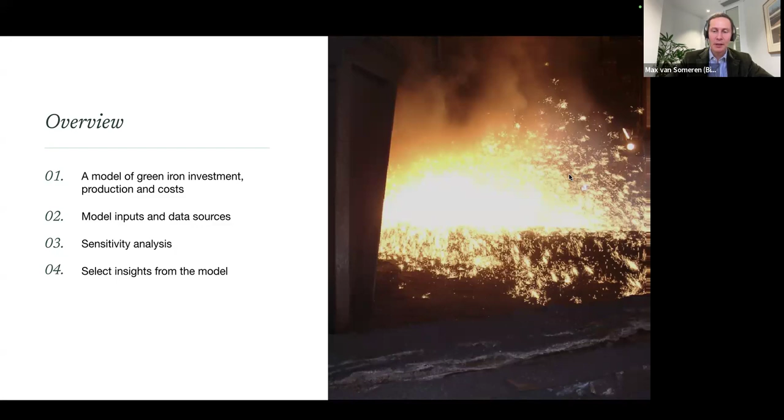So let me take you through the model. We can think about the modeling process in 3 different nested layers, a bit like an onion. So in the middle, we have the simulation of our iron production system, and I'm going to spend the majority of the time today talking through that. Outside of that, we then have an optimization process. So that runs the simulation hundreds of different times to come up with the optimal configuration of the iron making system to give you the lowest levelized cost of iron. And then we take those results and we post-process them into the results which were presented in the report.

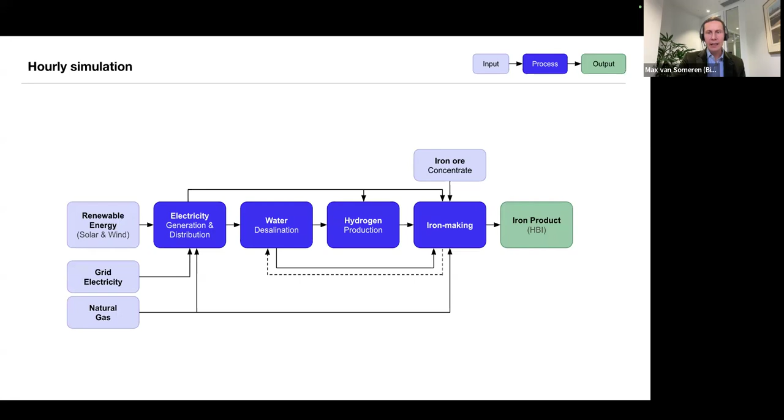In each hour, the first thing that the model needs to do is to identify how much of the input resource is required to meet the iron demand. This model always wants to produce as much iron as it can, so it produces up to the limits of the constraints which are put upon it.

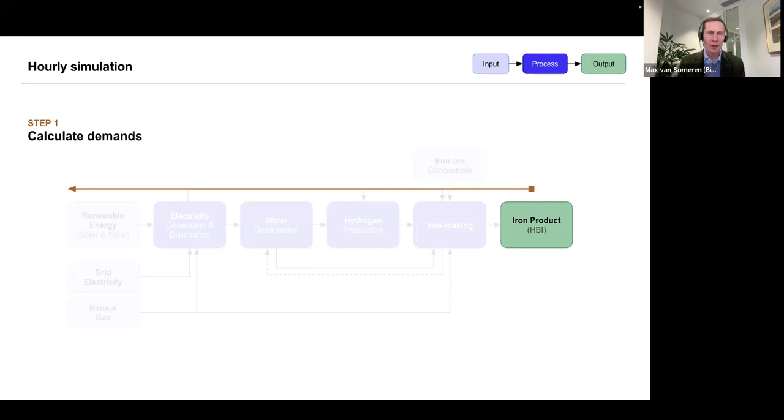We can feed back from the target amount of iron, so the nameplate capacity of the iron making plant. We can feed that back to the requirement of hydrogen, the requirement of water, and the requirement of electricity. Electricity is an input into all stages of the process, and the largest consumer by far is the hydrogen. So everything really comes back to understanding what your electricity supply needs to be.

As I mentioned before, we use historic weather data to estimate the availability of renewable electricity, and that will depend on the specific configuration of the model which we're running, so the size of your solar farm, the size of your wind farm. If there is sufficient renewables available, then the whole system will run off renewable energy. However, if there is insufficient renewable energy available in that hour, well, the first thing the system will do is it will look to the battery. So is there sufficient electricity in the battery that it can draw upon?

If the battery is empty or the power outputs of the battery are exceeded, then the system will look at behind the meter gas turbines if they've been included in the simulation. We didn't actually include them in the core cases which we present in the report, but they are presented in some of the variations later on in the report.

And then finally, if there's still a shortfall of electricity, then the system will turn to the electricity grid, and it will look to the grid for firming power up to the limit of emissions constraints which we've applied. And for our core cases, that meant staying within the constraints of the hydrogen production tax incentive, 600 kilos of CO2 per ton of hydrogen produced.

Now, if we're in the happy situation where we have excess renewable energy, then the first thing that we do is try and fill the battery behind the meter. If we've still got excess electricity, that can be sold back to the electricity grid. And if we have hit the limits of the grid or the price of electricity is actually negative, then the system will curtail, so it will stop the production of renewable energy.

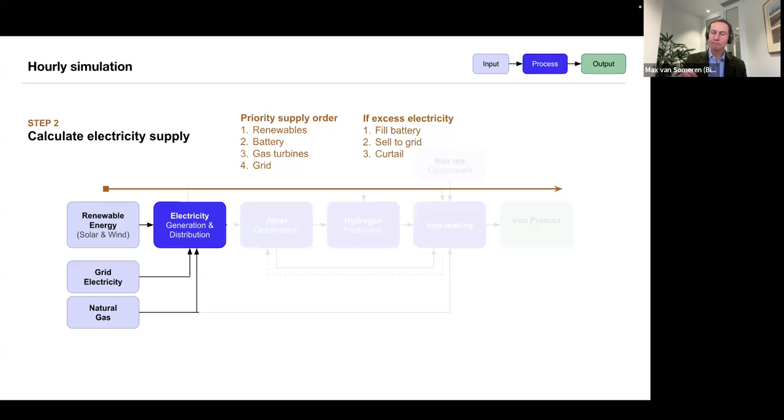If we're in the situation where there is insufficient electricity available after all those measures have been taken, then we need to look at how electricity is rationed out between the different consumers. And we set a priority demand order. And this is where my background as an engineer really comes through, because I've made a series of prioritized decisions rather than doing any sort of market-based approach to sharing out the electricity. That's a simplification, but we found it's actually quite effective in this circumstance, because the priorities are quite clear.

Water only draws on a very small amount of electricity, but it's critical to the functioning of the rest of the system. So water receives electricity first. Then we give electricity to the production of iron to ensure the iron making plant runs as much as possible. And only then is electricity supplied into hydrogen production, which takes at least 70% of the electricity in most of the cases.

And that's where we tend to see the most variability knocking through from the variable supply of the renewable energy into the actual production of the hydrogen. Now, there is a situation where the production of hydrogen is also influenced by something else.

That is if we allow the model to export electricity back into the wholesale electricity market when electricity prices are particularly high. So in that situation, we establish a certain break-even price where it's essentially more valuable to supply electricity, which we have back into the wholesale market, rather than supply that into the iron-making process.

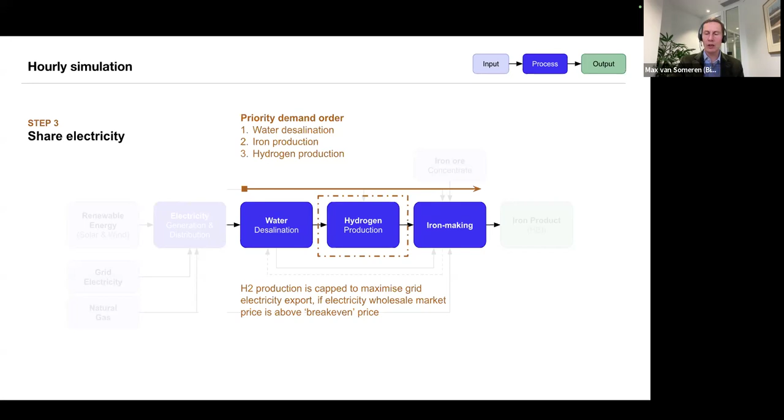In that situation, the electrolyzer will stop and any excess electricity is provided back into the electricity grid. That revenue can then offset some of the costs of iron production. And that's an important feature of the model, which will knock on through to the results, which we'll present later.

So once we've done all of that, we've got a picture of supply and a picture of demand, and there is then some iteration required in the model because there is some interaction between these different things, which means that it can't all be solved at once. But at the end of the hour, you end up with a balanced picture for the amount of electricity which is supplied and the amount of iron which is produced.

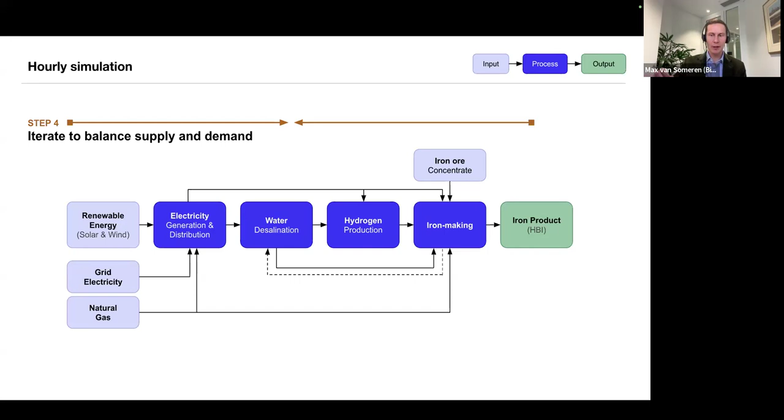So you've got an output volume of iron. You've also got a calculation of input costs of grid electricity, any natural gas that you've used, and the amount of iron ore that you've used as well. And then the whole thing begins again. So you pass the state of the system into the next hour.

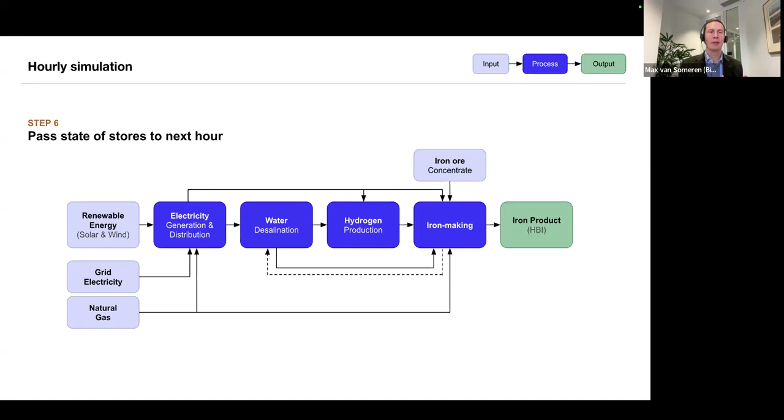The critical aspect of the state which is passed on, and which makes the system a truly dynamic system, is how full your different stores of electricity, water, and hydrogen are. In the next hour, of course, you'll also have different inputs in terms of your renewable energy and your spot market price and emissions intensity.

So each cycle is an hour, but we need to simulate as a minimum an entire year. We model the 8,760 hours within a year to simulate that year. And then we take that year and we use that year multiple times to build up a life cycle cost of the system, which is used to calculate the levelized cost of iron production.

And that is the overall complete cost, including the financing of the capital, the input variable costs, etc., divided through by the amount of iron which is produced. So we can run the simulation multiple times using different configurations. And when I say different configurations, I mean a different size solar farm, different size wind farm, different size battery, electrolyzer, hydrogen storage, water production, and iron production as well, and grid connection.

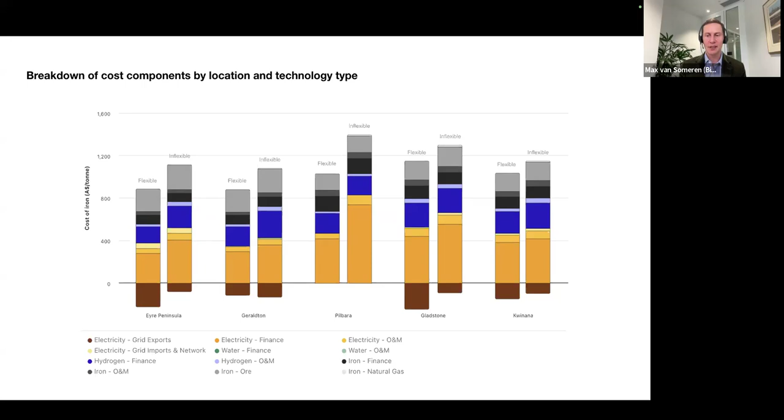Okay, Ben, I'll now hand over to you to take us through the model inputs and data sources. I'll try our best to move us along at the right time, but if you need me to change slides, just let me know. Amazing. Thank you so much for that, Max, and thank you all again for tuning in.

To keep things flowing, I'll get right into showing where we've published our underlying data inputs so that you can follow up, and please do, on whatever we aren't able to cover today. They take the form of the model input data pack and model input supplementary material, which can both be found on the TSI website under the model methodology section of the Green Iron report page.

The first will probably be a lot to take in because it is, in published form, quite literally what our model draws on. You'll find 122 variables organized by tabs representing the scenarios and sensitivities that we investigated. You'll also find the hourly weather, electricity prices, and grid emissions data for relevant scenarios, which are central to the optimization routine. The supplementary material then is a compilation of documented research for critical inputs.

So having now seen how the model optimizes for all the different ingredients that go into iron making, I'm going to spend the next 15 minutes describing some of the main inputs that underpin the model. I'll begin by describing differences between the 5 scenarios. This will take me into a description of locational cost factors, grid assumptions, and energy generation inputs. And I'll finish up by going into some detail on our iron making inputs that feature important variation by technology, ore type, and location.

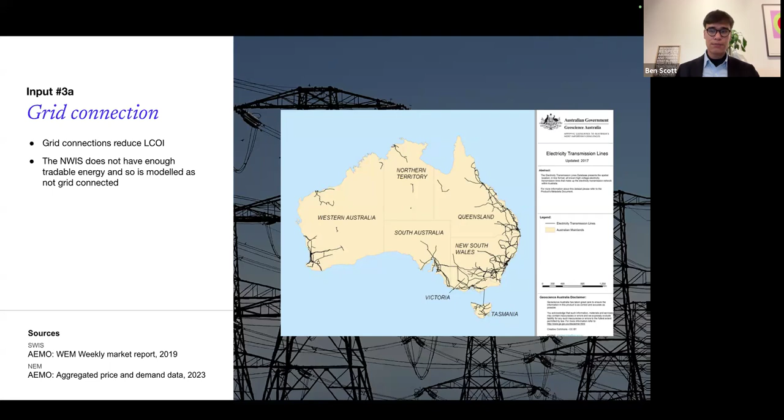Now, for the other grid-connected scenarios, it's clear that not all grids are made equal. Be it the SWIS or the varying regions of the NEM, grids feature different prices and emissions intensities. Cheaper energy makes it more desirable to import energy instead of building energy-generating assets. But we also treat the HTPI emissions limit that Max spoke about earlier as a hard ceiling, which means that less energy can be imported from grids with higher emissions intensities.

As an important aside, you'll have noticed that West Coast scenarios draw on data from 2019, while Eastern scenarios from 2023. This is a data limitation. Given the endogeneity of weather, emissions, and energy prices, we needed complementary data sets for any single calendar year, and these are the years we had available to us.

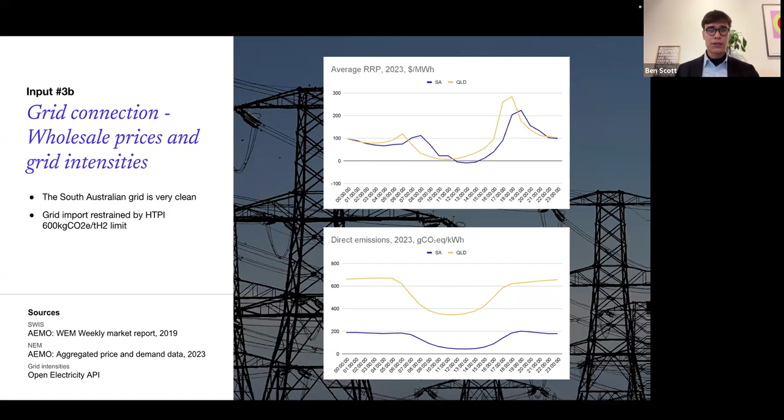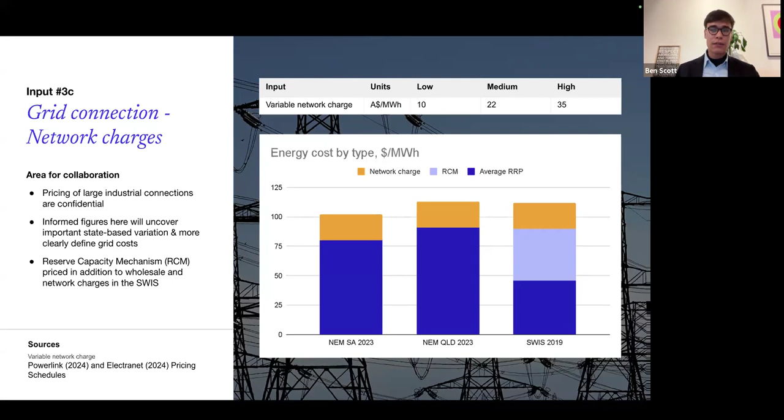For all the wholesale electricity prices, there is an additional charge for use of the network. In the model, we vary this by a flat $22 per megawatt hour in the base case across all scenarios, $10 in the low and $35 in the high. You'll see on the graph here that network charges translated to roughly 20% of grid energy costs on a per megawatt hour basis, which roughly accords with industry understanding. We do view informed updates to this input as a driver of interstate variation, but as Max will cover later on in our sensitivity analysis, it is not likely to significantly impact the LCOI.

And so now moving beyond the grid, we can turn to how energy is generated behind the meter. We tried to minimize assumptions when fielding model inputs, and this is particularly true of our decision to lean on the most recent GenCost report and its underlying Aurecon data as the basis for costing solar, wind, battery, and hydrogen technologies. We are aware of much cheaper costs coming out of the likes of China that would materially reduce LCOI estimates, but we're unsure how these costs would translate to the Australian context, given availability and quality assurance concerns. Our hydrogen tank storage estimates primarily drew on the 2018 CSIRO hydrogen roadmap, but were also informed by industry consultation. These are extremely expensive compared to cavernous and depleted gas field storage options, which are currently being explored.

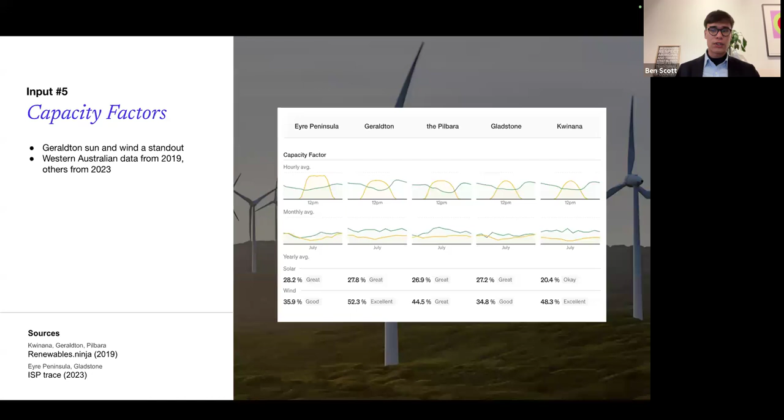So equipped with installation costs, we can now turn to the hourly production of solar and wind energy based on capacity factors. Australia, as we know, is endowed with abundant renewable resources. On an international scale, all the selected locations have outstanding sun and wind. Capacity factor data for the West Coast comes from Renewables Ninja, which draws on NASA's atmospheric analysis dataset named MERRA and the European Climate Monitoring Solar Radiation dataset named SARAH. For the East, we take hourly capacity factors that underpin ISP trace data for renewable energy zones. The ISP draws on datasets from CSIRO and BOM.

Now, taking stock quickly, we started off with locational cost factors and the implications for capital-heavy projects like we have here with a green iron plant. We then spoke about grids and the implications of their varying prices and emissions intensities. The lower the better for both cases. And just now, we looked at behind-the-meter energy generation and the location-specific hourly capacity factors that underpin their production. I'll now turn to the iron-making process.

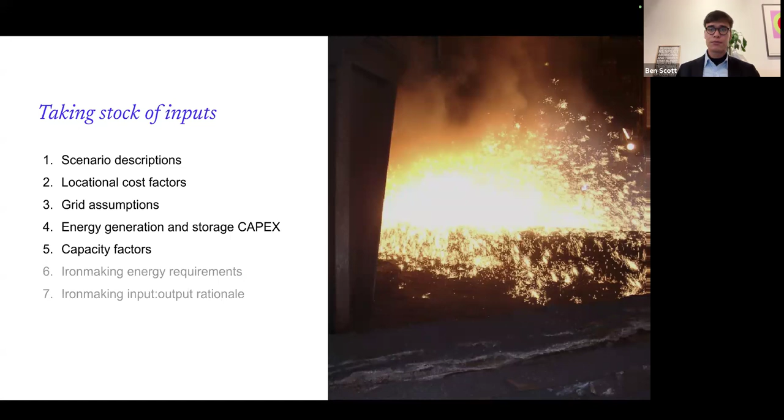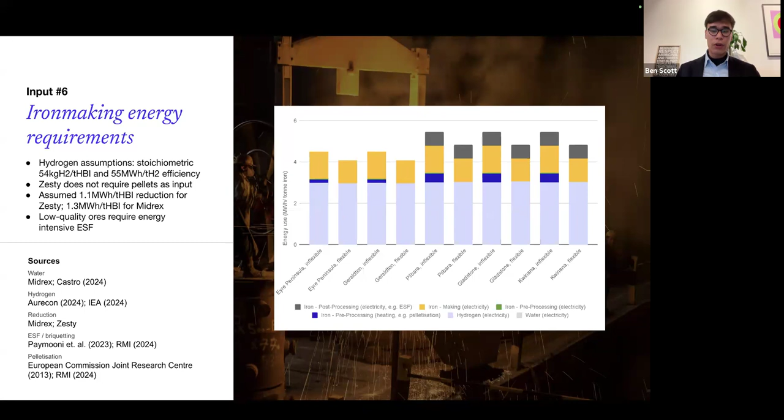Moving to pelletization, the dark blue, we come to a substantial difference between the flexible and inflexible scenarios in that the flexible shaft technology does not require pellets as an input. This equates to energy and capex savings, the former being larger for hematite charge, given 60% of the required heat is provided by an exothermic reaction that takes place when pelletizing magnetite. According to technical reports published by ZESTY and Midrex, and assuming both have had electrical heaters installed, ZESTY is slightly more efficient in the reduction stage, as captured in orange. And finally, we see substantial differences required to smelt a low-quality hematite that is otherwise replaced by a very low-energy briquetting process for high-quality ores.

So now that we've covered some of the energy inputs, we can look into the material input-output rationale. Our rationale follows high-level iron-making principles. And to describe the approach, I'll run through a stylistic example for the 62% hematite Midrex ESF route that would be applicable to the Pilbara, Kwinana, and Gladstone scenarios. Our model assumes that we start off with concentrated fines arriving at the door of our plant. The gangue ratio in black is implied by the given level of iron content in dark blue, which in this case is considered as pure hematite, but in practice will be a combination of minerals.

Once pelletized, we assume a loss in moisture content, but no other compositional changes. These pellets then go into the reduction shaft, in this case, a Midrex shaft with a 94% metallization rate to achieve 80% total metal iron content, denoted as FeMet in pastel blue. Hot metal then goes into the ESF, which performs a gangue removal function until the stated 85% total metal iron content goal is achieved. In practice, the ESF will perform some reduction on the remaining Fe and oxygen. And with that, I'll hand back over to Max, who will go through some sensitivities and more insights from the model. Thank you very much, Ben.

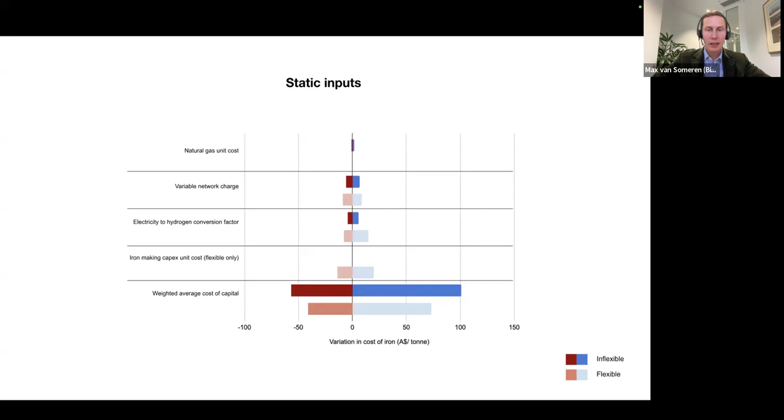And we also looked at the impact of the variability or the uncertainty in the iron making capital cost, particularly for the flexible technology, because it's a lower technology readiness level. And that had some level of input, but by far the dominant impact is the weighted average cost of capital. Our baseline assumption was 4.5% above the rate of inflation as our cost of capital. The high was 6% and the low was 3.6%. As you can see, it makes a big potential difference on the cost of iron. It's a very capital intensive system. And there's a greater difference for the inflexible technology than the flexible technology, because the inflexible technology is more capital intensive than the flexible technology.

We also looked at the variability in our hourly inputs as well. As I mentioned earlier, and then Ben went into more detail on, our hourly inputs were based on historic weather and spot market price data. So we decided not to go down the route of attempting to simulate market price data. That was a whole other project in itself. But what that did mean is we were constrained to available historic data sets.

Now we picked 2023 as our representative year because there was less global economic disruption than some of the earlier years, and it's relatively recent as well. We're able to use that for the East Coast cases. But we also reran the model for the Eyre Peninsula looking at data from 2021 when the average price of wholesale electricity was lower, and for 2022 when it was much higher due to the Russian war on Ukraine.

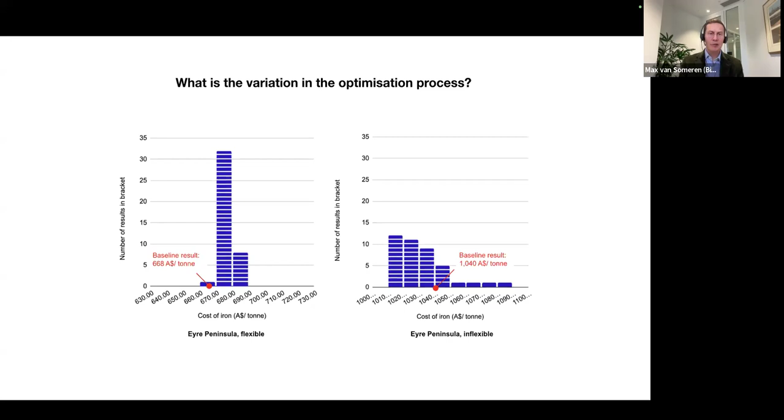For the inflexible technology, the spread is broader. So our baseline result was $1,040 per ton. You can actually achieve almost $30 less than that through multiple runs. So that suggests that our baseline result is actually slightly conservative for the inflexible technology. But the more interesting question is why? Why are these two things so different to each other?

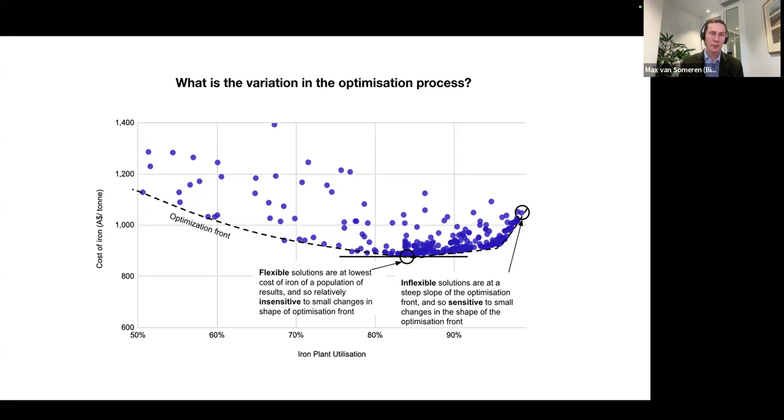On the other hand, for the inflexible technology, we're right up at the 100% utilization point, a much steeper part of the optimization front. And any small variation in what that front looks like can knock on through to quite a big change in the levelized cost of iron that you take as the optimal solution for the inflexible technology. So one of the takeaways from that was that if we were to do this again or focus in more detail on a particular location, we would actually do multiple optimization runs, particularly for the inflexible technology.

A couple of insights from the model then, just to finish off. There are plenty more insights in the report and, of course, lots of policy recommendations which have been covered in previous webinars, but we just picked two to talk through. The first was about the relationship between the grid capacity and the cost of iron. In this analysis, we constrained the capacity of the grid for the flexible and inflexible cases in the Eyre Peninsula.

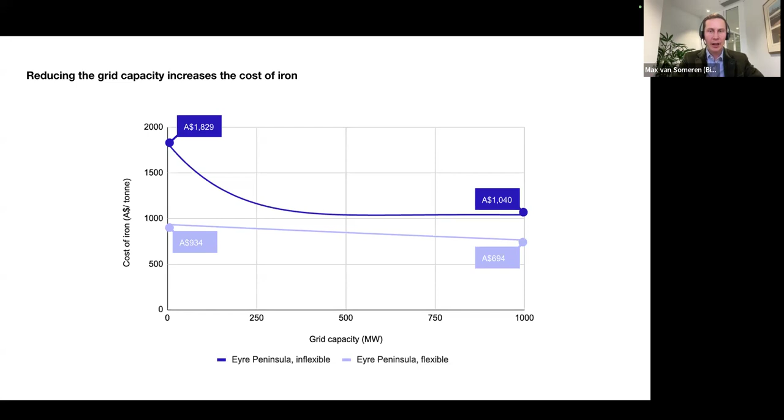For the flexible technology, we also see a relationship between the cost of iron and the grid capacity, but it's not nearly as pronounced. That makes sense. The flexible technology can operate around that constraint much more effectively. The main reason that the cost of iron is lower still for the flexible technology when you have a larger grid capacity is you have the ability to export up to that grid capacity as well. So you get the benefit that I mentioned earlier of the revenue from electricity generation and selling that back into the electricity grid.

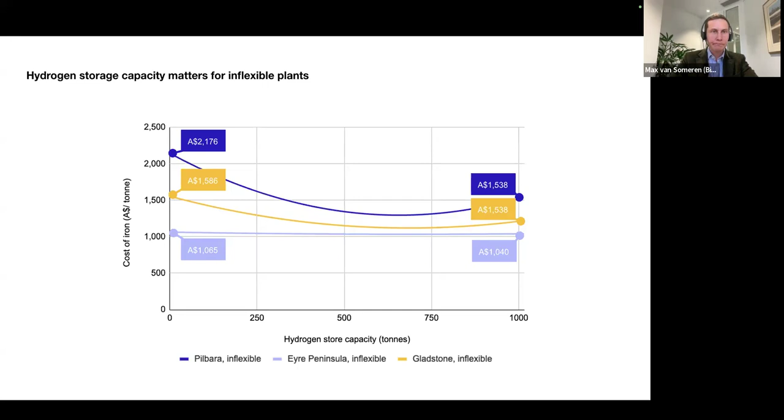So just before we get to the Q&A, just a couple of closing thoughts. I would just like to highlight that I know that we are not the first organization to study green iron in Australia, and we certainly won't be the last. There's lots of people doing great work in this area, but we do feel that we've taken a step forward through the depth and breadth of analysis which we've undertaken here.

And on a personal note, I would just like to thank Ben, Ingrid, and the rest of the TSI team for working with me on this piece of work. It's been an absolute privilege to work on.

We think it's a timely report and hopefully an important contribution to the development of the green iron industry in Australia.